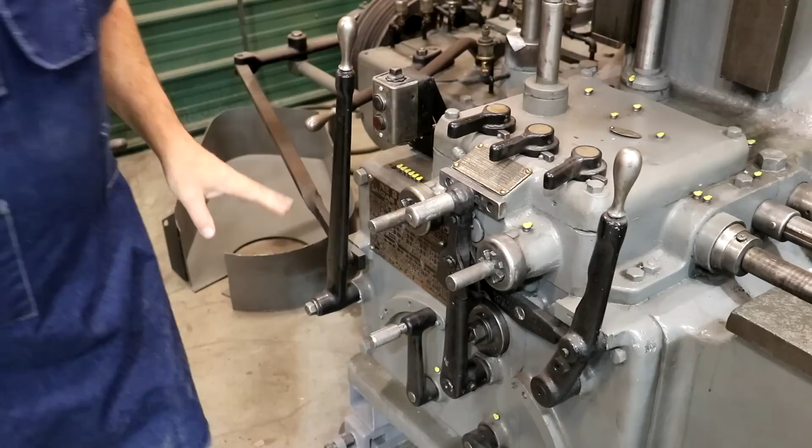So there are multiple places on this machine where we have little spindles coming out where adjustments can be made. For example, right here, you put the handle in - this one adjusts the table in and out, this one adjusts the head up and down. There's one over on the cross feed on the table to adjust the in and out of the table, and there's three of these over on the back, one that adjusts pretty much all three axes here on the end of the tailstock.

But here's the problem - you see how long this stud is that sticks out. When you slide this up on there, notice it's not flush with the end. Right now, when you come around here, boom, it's interfering with some of these pieces here. If this was out here at the end, it clears perfectly. So what looks like has happened, my thought is this thing has gotten worn over the years and they've kept milling it shorter and shorter to get good teeth on the end, and right now it's so short that we've got interference.

What I want to do is come in here and actually make a little section to go on here. I think we're just going to weld it on, or I think this may be cast iron, so we might braze it on there - but still, weld it, braze it, whatever, to get that little extension out where we have the clearance that we need.

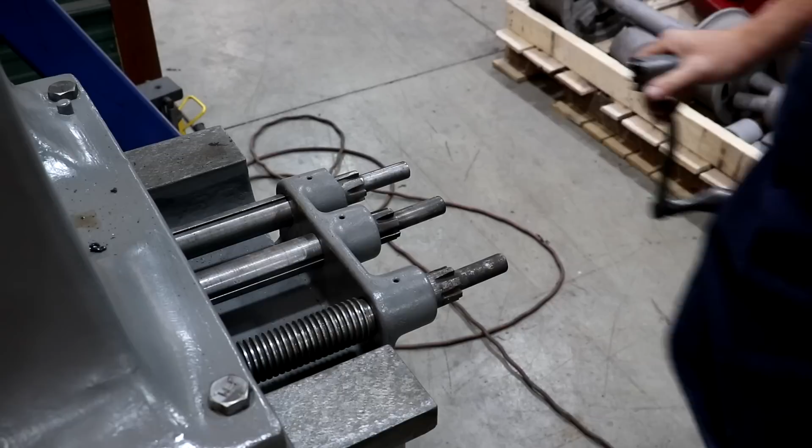We have the same problem over on the end of the tailstock, or end of the bed - it interferes with the other ones. There's three of these right by one another, and you need that same clearance for the handle to clear. So that is the game plan. Just showing the ones here at the end of the bed, it's got the same problem - you come around here and that hits. We come out to the end where it should be and it clears. So we just need to add a little extension in there to give us a little bit more room.

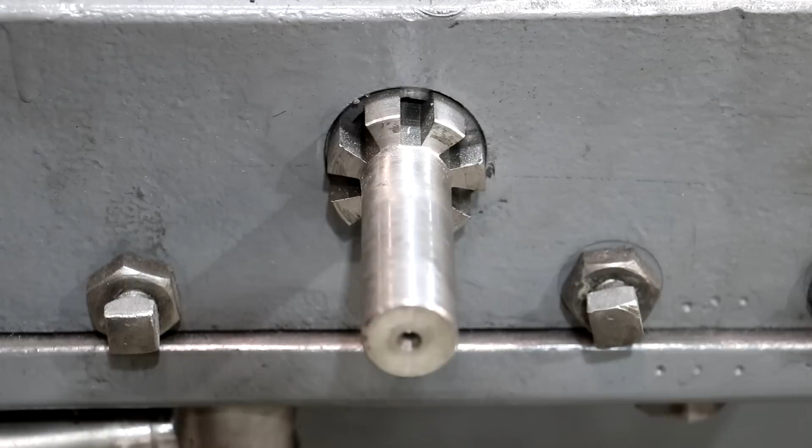This is the spline that we've got to match. This is actually one that I made - I have remade two of these that were just so worn out that I replaced them while we were rebuilding this machine. Eventually, if I tear into some of these other areas, I may replace more of these over on the other end as well. Some of those are a little bit worn as well, but they're still working right now. But if I do ever have to tear in there, I'll probably just replace them and make new ones.

But let me talk about this - so there are 7 splines in this. I'm calling it a spline.

And it's more or less 7 splines in here, which is an odd number. Divisions won't be too challenging, but it's not going to be an even number of degrees between settings. We'll probably end up cutting these using my dividing head rather than a rotary table, just because it'll make the math a little easier.

Basically what we got to do here is make the opposite of this. It's a little different setup because with this we used a horizontal milling machine with a cutter that had a 30-degree included angle on it. With this, because we're milling on the top, that's not really an option. If we were milling this way it'd be one thing, but milling across the top is a little different.

We're basically removing the material here and leaving the hole, so it's kind of the opposite of this. We are going to actually do this over on the vertical mill. We'll use the dividing head to make our divisions, and it's not just as easy as making a straight cut through here. There's a 30-degree included angle, so 15 degrees on either side to get that right. A little complicated - you're actually going to have to make 3 passes around to get everything removed, and you'll see that as we get over there.

All right, I think I got a little sketch here of what we need. So 1.5 inches long, a little less than 1 5/8. It actually looks like this was originally 1 5/8 and they turned it down to 1.605. We're going to match that diameter, so just a little under 1 5/8. Total length is 1.5 inches. This is not to scale, and we'll make this little step on the end.

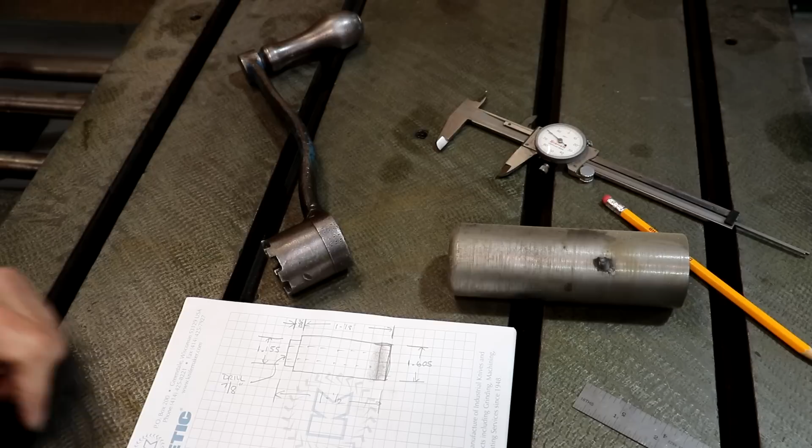That's 3/8 inch deep, 1.155 in diameter, and then there's a 7/8 inch hole drilled all the way through. I'll probably drill it just a little bit undersized, and then at the very end we'll run a drill bit down through there and clean it up so everything lines up perfectly with the existing hole. So let's go over to the lathe and see if we can get this little part knocked out.

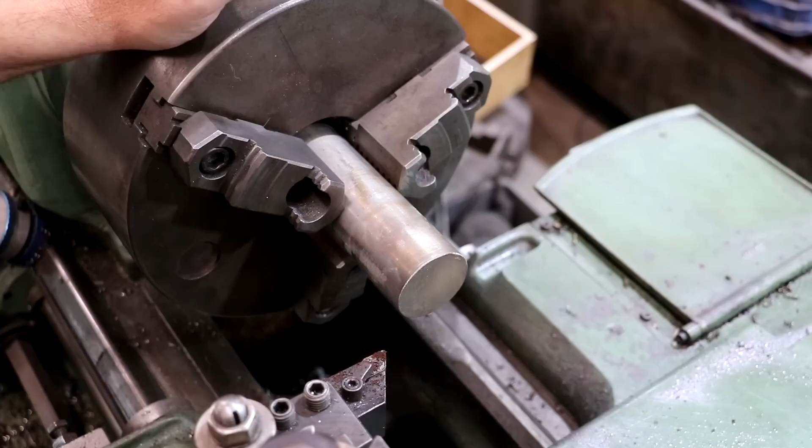Over at the metal lathe, Monarch Model K 16-inch metal lathe, we're going to go ahead and start turning this down. I'll start by facing the end - it's just a saw cut there. We'll turn this down to about 1 5/8, a little less than, about 1.5 inches deep. All right, we'll touch off here, and just face that end.

Might have cleaned up, we'll take a look at it here just a sec. Yep. Zero out my Z-axis - I need to go in 1.5 inches, which is about right there. I'm just going to put a mark where I'll know how far I got to turn down. We'll go a little past that.

Let's see where we're starting at - we're at about 1 inch, 1 7/8 inches. So we've got about 250 thousandths to take off of this. And touch off here - I'm just going to take about 200 thousandths.

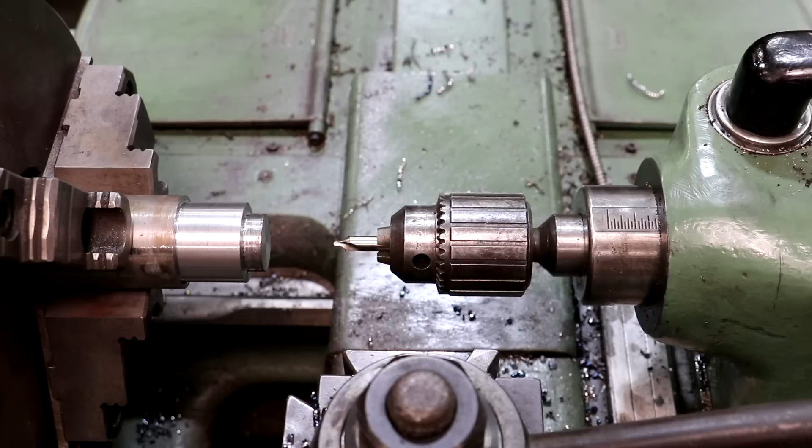7/8 hole is what we're going after. I'm going to drill it one size under 7/8. We'll clean it all up at the end once we get it welded together, make sure it's aligned good. 55/64 is what I'm going to go with.

Right now, we're just going to start by putting a center hole in here. This will just help my drill bit find the center. I don't need much, just a little dimple to get that bit started.

I'm going to start with a 3/8 inch drill just to kind of get a hole started in there. I got a mark on my drill bit where I want to go to, and I am just clearing those chips out as I get down in there.

All right, that should be plenty deep enough. Slowed my spindle down just a little bit there for this size drill. We're about 350 RPMs.

Again, this is 55/64, which is just a little under 7/8. All right, we are all the way down to the bottom of that hole.

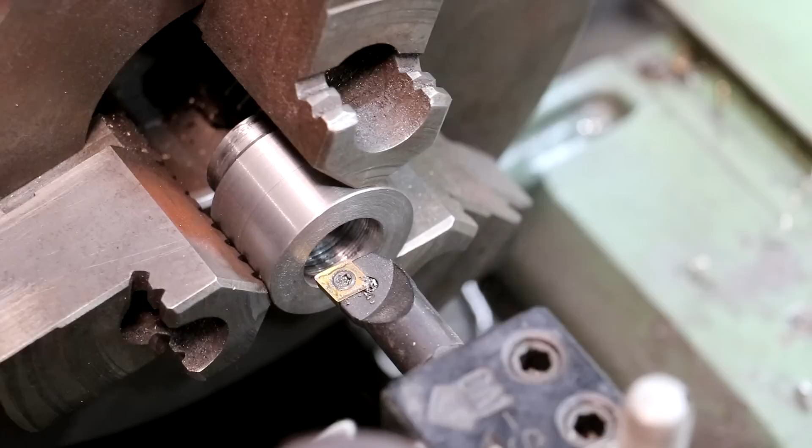Guys, I said I was done with the lathe, but then I realized I got one thing I need left to do, and that is I need to counterbore on the inside of this down about 300 thousandths, just to give some clearance for those teeth so they don't bottom out on that shaft.

The little splines are not to the same full depth as the bore, so we just need a little clearance in there. So here's what we're going to do.

I'm going to come in here, touch off on this surface, zero my digital readout. I'm going to go about, let's just say 325 thousandths deep, which should be more than what I need.

And as far as that inside diameter, it's not critical. I just need a little clearance in there. So we're just going to bore it out a little bit. So we'll come in,

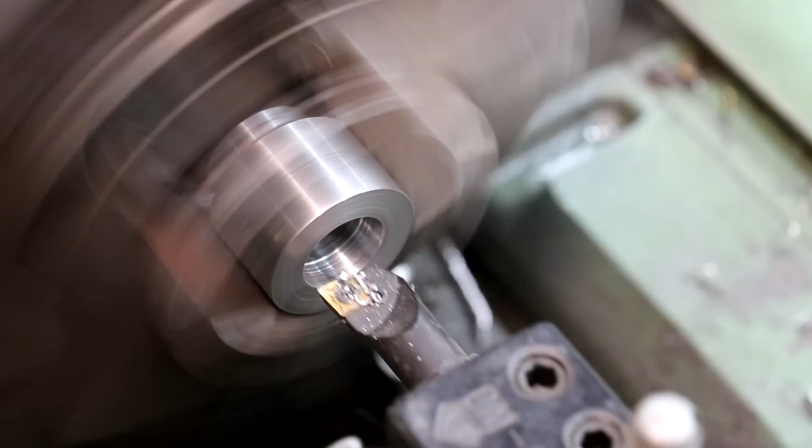touch off, and we're just going to start taking a little out. Again, 325 is my goal, my target on my depth. I'm just watching that on the digital readout. We're going to take another little pass here.

Over at my Wells Index vertical mill machine now, and we're getting ready to start cutting those teeth in there. As I said, we're going to use the dividing head to make our divisions for this. I've got a super spacer, I've been using it in the last couple of videos. You may ask, why am I not using that? Why am I using the dividing head instead?

I could use the super spacer, but it is based off of degrees rather than divisions. The dividing head is actually for making a certain number of divisions, and you really don't pay attention to how many degrees it is. The reason I'm not going to use a super spacer is because with 7 divisions, you take 360 degrees, divide it by 7, it comes out to 51.4285714. It's a very precise number, and it's not something that's very easy to indicate in on a rotary table that only has increments at 1 degree increments.

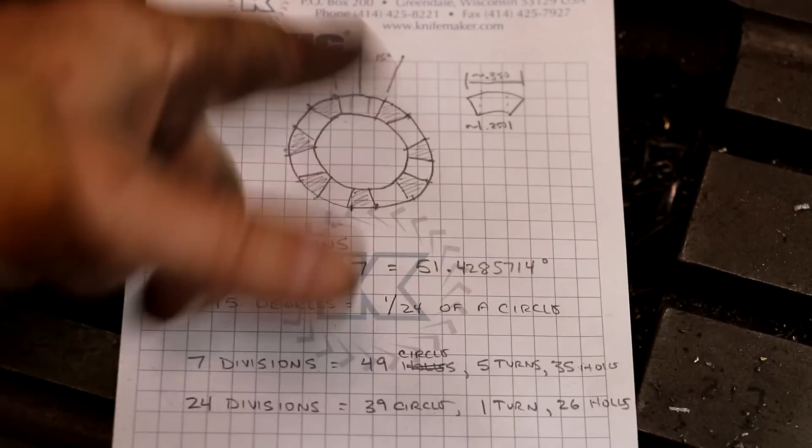So we're going to start by coming in here and making our 7 straight cuts. I'm going to show you a picture. Let me just go ahead and zoom you in on this and show you this and kind of explain the operations that we're going to be doing here. So I've kind of sketched out that whole pattern that we're going to be doing. The areas that are kind of open are the ones that I'm going to be removing as we go through here. And again, it's not a straight cut across, it's a 30-degree included angle across both sides.

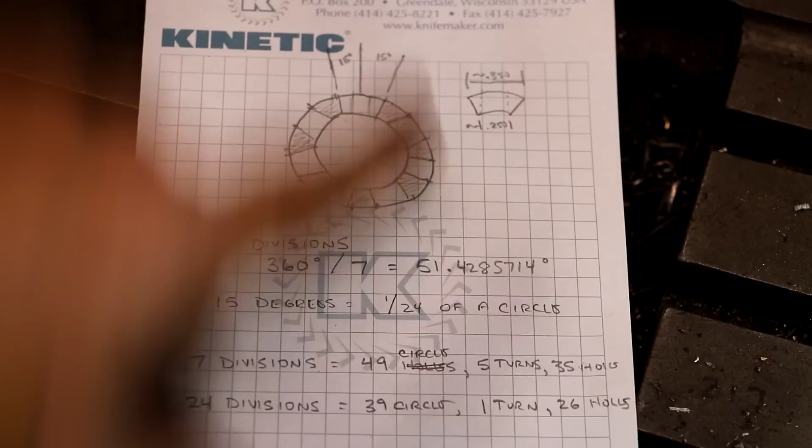So we're going to have to make 3 passes. The first pass is just going to be a straight cut down the center. Once I cut all 7 of those, then what I'm going to do is I'm going to actually turn the dividing head back 15 degrees. I will do that by changing my plates, going to 24 divisions, because 360 degrees divided by 15 comes out to 24 divisions.

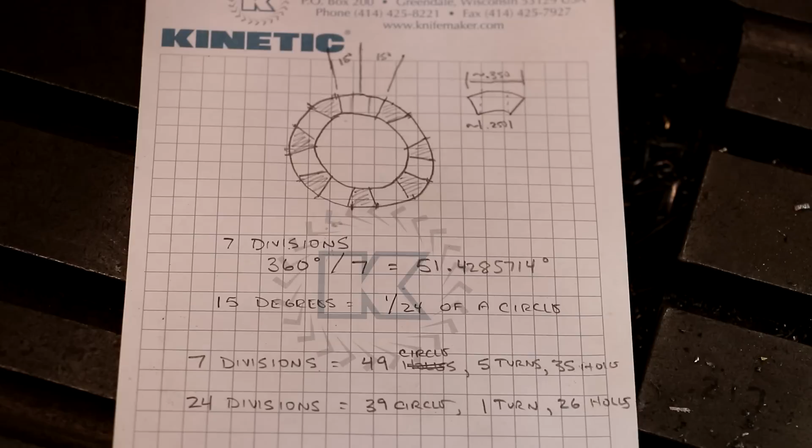So that's, you know, and I can use a different plate, with the same plate, different hole circles. So for the 7 divisions on this, I'm using the 49 circle, 5 turns, 35 holes. For the 15 degrees, which is 24 divisions, I use a 39 circle, 1 turn, 26 holes.

So I will rotate that head 15 degrees, and I'm going to probably have to adjust my axis a little bit, but I'll go in there and I'll cut 1 angle. And then I'll come back and I'll actually increment it back the 30 degrees, which would be 15 plus 15, and I will cut the other angle, and that will get our tapers on both sides, and hopefully after 3 passes we'll have all this done. So you can kind of see what we got here. I'm ready to roll.

Basically the small end of this needs to be around 250 thousandths. The large side, once we cut the tapers in there, is going to be around 350 thousandths. These are not exact measurements, just kind of getting close. So let's get in here and start making some cuts.

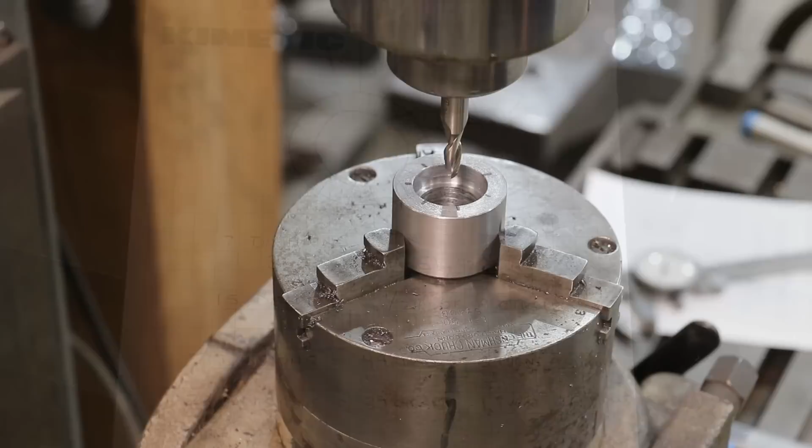I think we're about ready to go here. I've got my cutter set up right now in the very center, and I have that all zeroed out on my digital readout so I can go back there when I'm ready to, if I need to. I need my depth of cut to be about 300 thousandths.

So what I'm going to do is cut off this front side up here. I'm just going to unlock my table, come in here, and drop my cutter down till it just touches. We're going to come back off — that will be my zero on my Z-axis. Then I'm just going to raise my table up 300 thousandths, and that will get me to my total depth. Let's see, that should be about right there. I'll lock that height on the table.

Put a little dab of oil in there, and we're just going to feed out and let that cut straight out.

Okay, now we're going to index our part in 5 turns, 35 holes. 1, 2, 3, 4, 5, and 35. That should put us on our next place here. Same thing again.

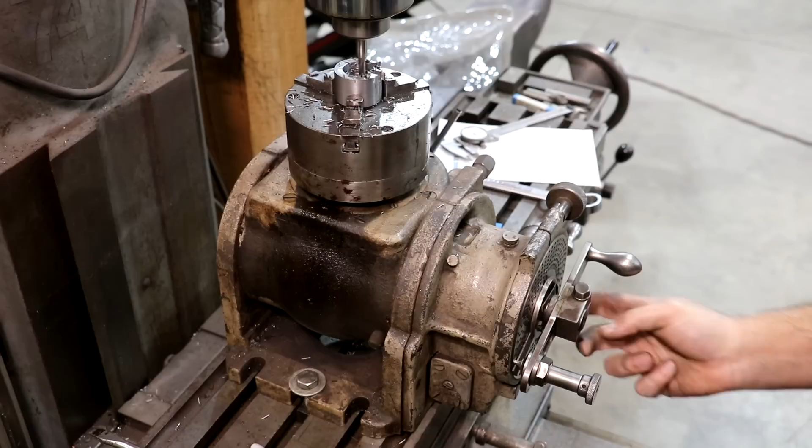I've got this little sector set for the 35 holes, makes it a little bit easier. 1, 2, 3, 4, 5, and I just go back around over here. Click in there, lock my spindle, give me a little bit of oil. And here we go.

This should be the last straight slot.

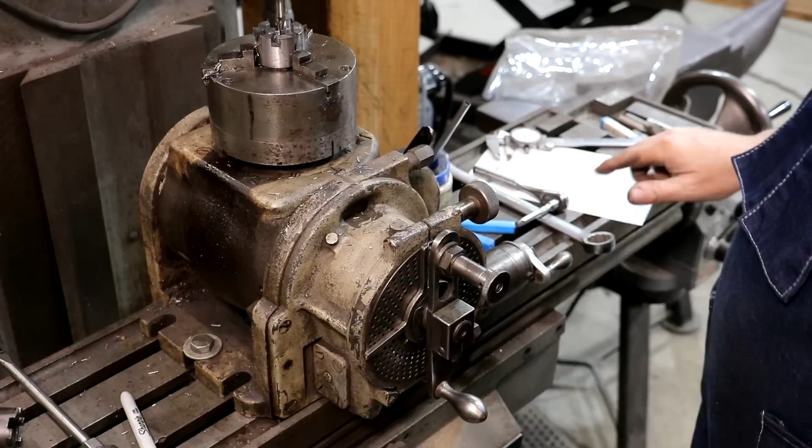So with my first round cut, now I need to turn the dividing head 15 degrees one way or the other. To do that, I need to change the circle in the plate that I'm using. Right now I'm using the 49 hole circle. I need to go to the 39 hole circle, which is the second one from the bottom. So we'll just loosen up this little spring-loaded piece, and I'm just going to slide it down to the circle it needs.

I'll drop my pin in place, and to index it 1/24th of a circle, which will be 15 degrees, I need to go 1 turn in 26 holes. Now I'm going to start by going backwards. Normally I turn this thing clockwise, but I'm going to turn it counterclockwise this first time. The next time we'll go back clockwise.

I'm not going to use the sector here — I'm just going to count my holes, my pins, since I've only got to make one division. So we're going to go 1 turn and then 26 holes. I'm just going to count them out: 1, 2, 3, 4, 5... 24, 25, 26.

All right, so that has turned this. Now what I've got to do is figure out which side we're going to cut on.

So we have turned our angle 15 degrees, but now our cutter is not lined up — we're not going to be on the center anymore. What I'm trying to do here, guys, is get the bottom end of this to about where it needs to be, about 250 thousandths. The top side, again, is going to come out to about 350 thousandths. So we're going to be widening out the top.

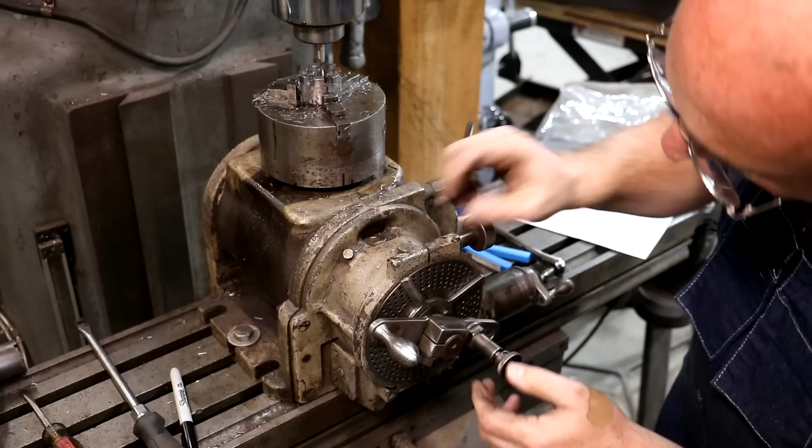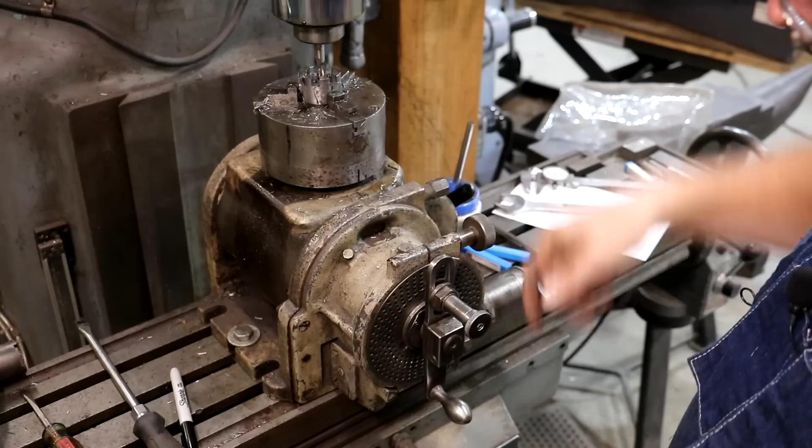Tighten that back up. And again, it'll be 1, that's 1 turn, and then I'm going to end up back in the holes I started with at the top here. Okay, and that's got me lined back up here at the top.

Now I need to go 1 turn and 26 holes in a clockwise direction to get 15 degrees in the other direction. So we go 1 turn, and I'm going to just count these out again. 1, 2, 3, 4, 5, 24, 25, 26. That's got me going my 26, or 15 degrees in the other direction.

Now I need to move my pin back to the 49 hole so that I can do my 7 divisions again, just like we did a while ago. So we'll loosen this up, slide this. All right, and I want to basically get my cutter lined up on that side, which looks like it's about right there.

And we will go ahead and make our rounds one more time. This should be the last pass. Like I said, we may have to do some fine adjusting, but this should be getting us close. One, two, three, four, five.

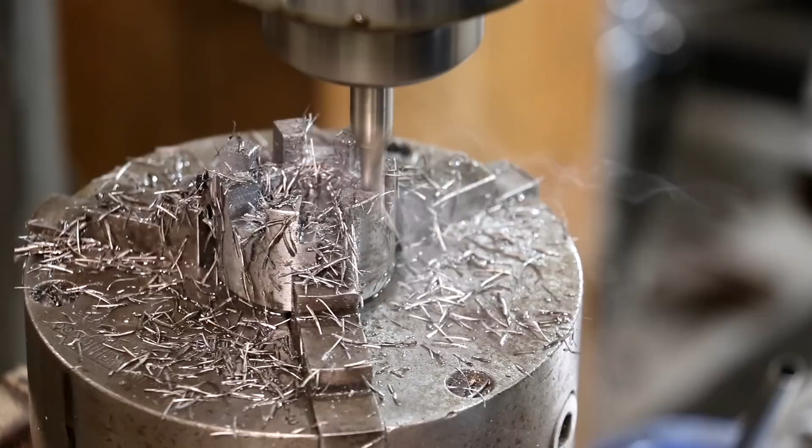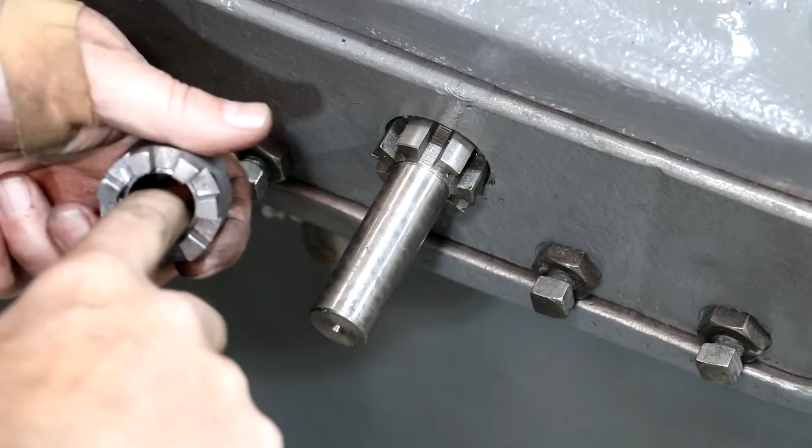All right, that should be about where we started. So there is the finished piece. And I did have to go ahead and bore this out to 7/8 for this to slide up on there. Let's see how it goes. This is one of the ones that I made, and that is about as perfect of a fit as you can get. I'm very happy with that.

There's more play in the gear than there is in the fit here. So this is one of the brand new ones. Let's go check the old original ones, the ones that I didn't make.

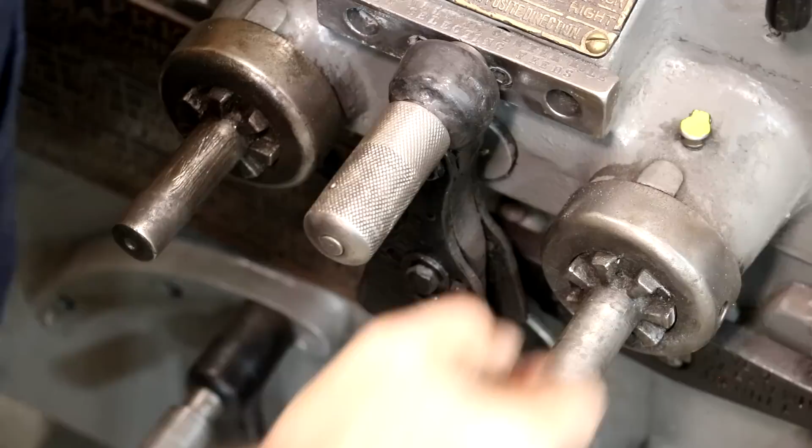So again, these are the old original ones. There is a lot of wear in them, a little bit of slop in there, but that's mostly just from 100 years of cranking on these handles. These actually engage deeper than the handle that I had. I'm happy with that, and I think that's going to be just fine as well. That's better than what we had, so I think we're good.

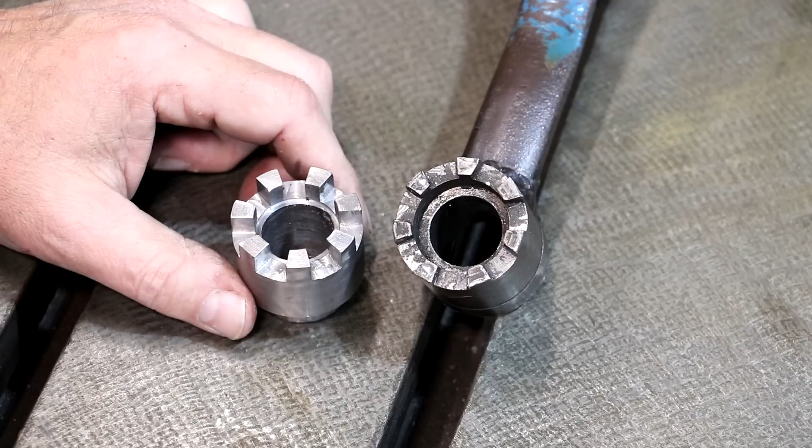We're getting ready to go weld that onto the old pin or old crank handle. So again, just take another look here. Next step is I need to get this ready to weld. Before I do, this is the original, of course, and I want to get these teeth off of there so I've got a nice flat background to weld up against.

I think what I'm going to do is just take this over to the belt sander and knock that off real quick. That'll be the quickest, fastest way to get it out. And we'll then go in there and weld the new piece on the end, get that extension in there like it needs to be. I did drill into a couple of tabs, there's a couple of holes.

I took that over to my drill press. I was trying to determine if this one was cast iron or steel. The handle is obviously cast iron. It's been welded, brazed, tigged. Looks like it was tigged. That may be bronze, I can't tell. But it was welded on here at some point in time. And I wasn't sure if this was cast iron or whether this was steel.

But based on the chip that came out of that, I got a nice long stringy chip. That's typically what you'll see with steel. With cast iron, you tend to get little flakes coming out. So we'll actually be able to weld this. I'm probably just going to use the TIG welder and TIG that up.

So I'm going to take this over to the belt sander. We'll knock those old teeth off. I'm over here at one of the most used machines in my shop, which is this old Porter Cable belt sander, and we'll knock these teeth off of there.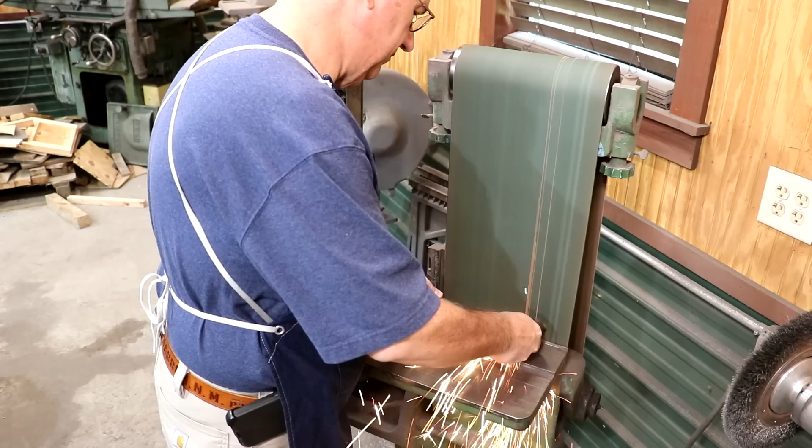Easy peasy. I'm gonna go ahead and put a little weld prep in here as well.

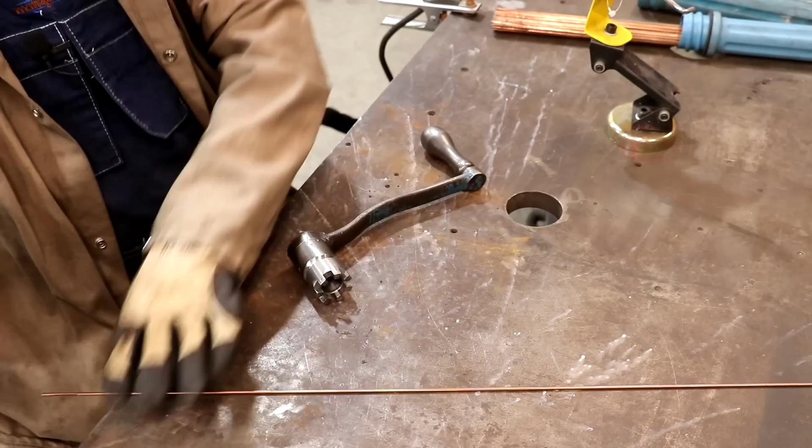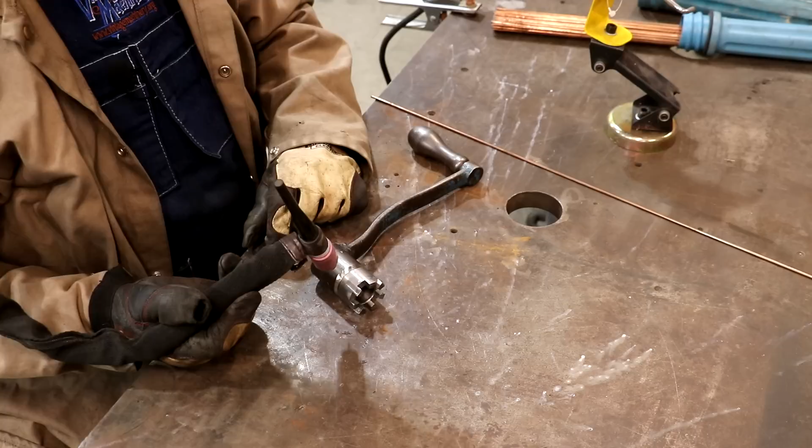All right, I think we are ready and set up to do some TIG welding over here. Guys, I'm gonna just tell you right now, I'm not an expert welder by any stretch of the imagination, but I think I can get this done without any problem. So I'm gonna probably tack it first in a couple places, and then we'll see if we can weld that in there.

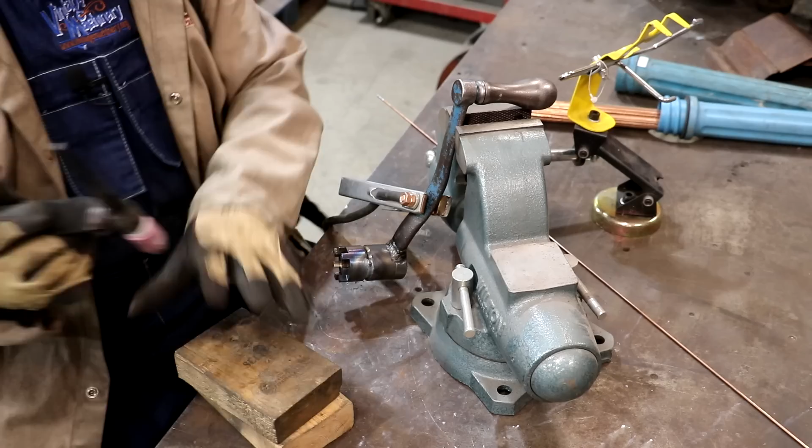Start by just slowly putting some heat into it. I'm going to flip it over to the other side. Just want to make sure we're getting this kind of done evenly. All right, I changed my setup just a little bit here. Just put it in a vise so that I could get to this bottom side. And we're going to go ahead and fill that in.

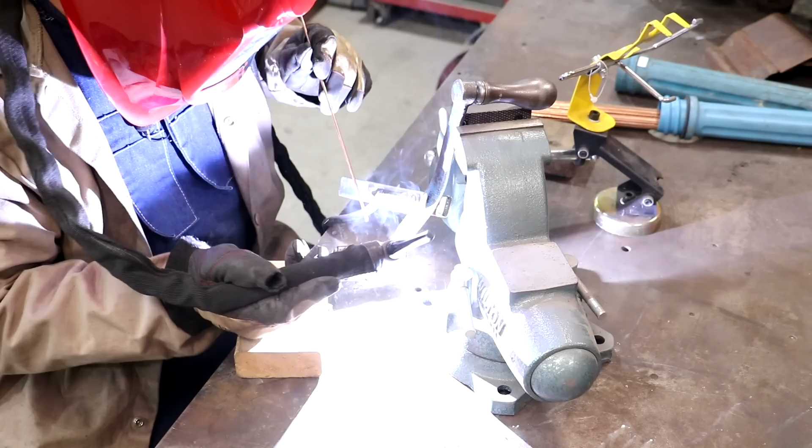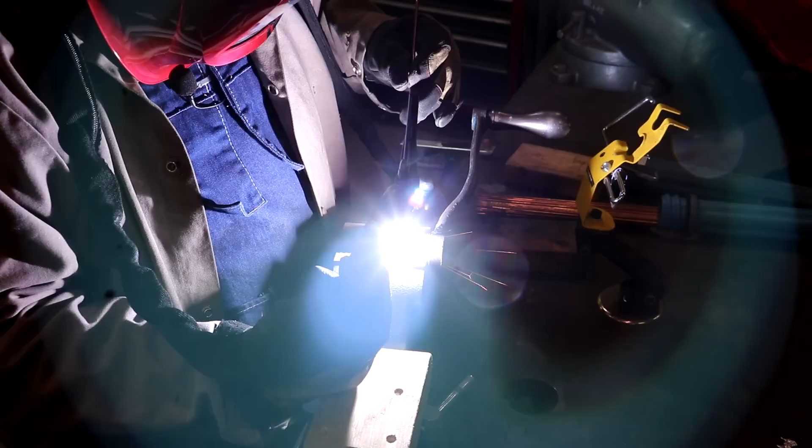All right, I'm over at the radial drill now. And what I want to do is just pass the drill bit down through this just to make sure everything's aligned up on that center hole. So I've got my drill bit in here. This is like a 7/8 inch drill bit. And we're just going to go all the way through it. I'm just feeding this by hand. And we're all the way through.

All right, and here we go. This is the moment of truth. We're going to put this in here. And look at there, that now clears those handles. That's exactly what I need. Fits good. I'm happy. There's the ticket.

I think I'm going to go ahead and give this thing a nice new coat of paint. I might paint it yellow just because it's one of those things you're always looking for it. It's never where it's supposed to be. And maybe if I painted a bright color, it'd be easier to spot in the shop.

So with that, I think we got this job done. Well, there we go. Not a super high critical thing to get this machine up and running, but something that's been on my list for a while. Glad to have that knocked out. That's going to make operating this machine a heck of a lot easier.